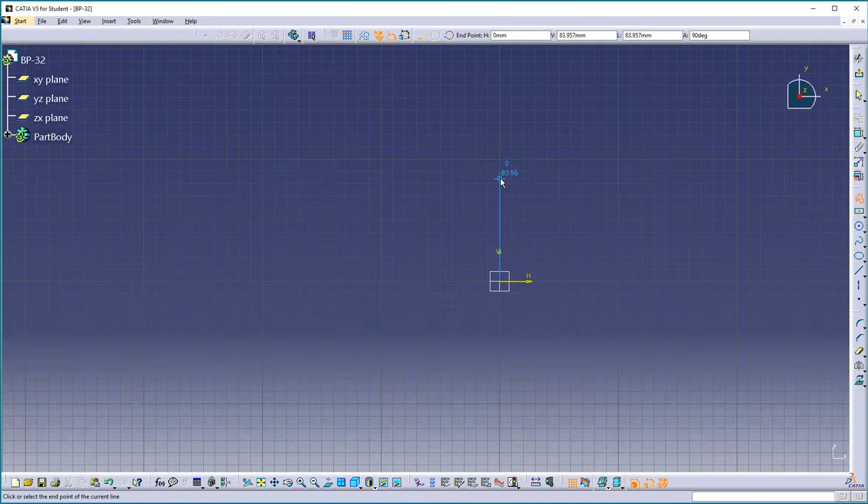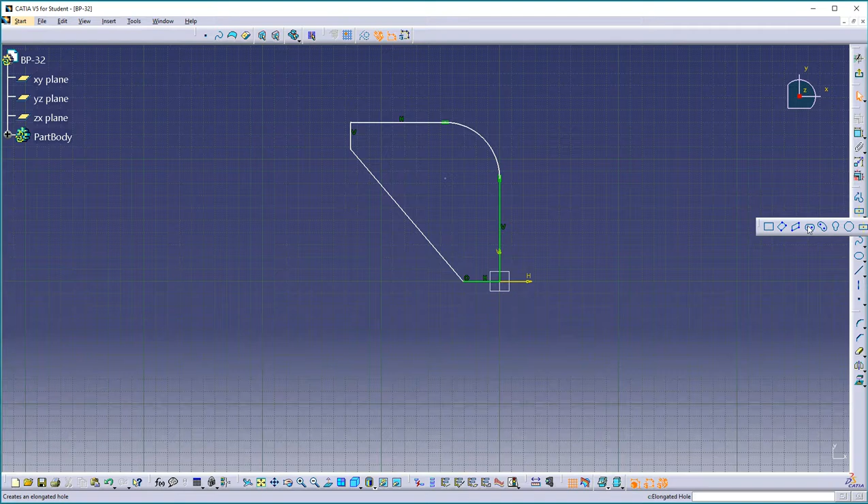I'm going to go to my profiler tool and select here, here, make it come across, here, here, let's make it come down, let's make it come in here, and then close it out. That's our basic profile. Let's right click on this line, object, make it horizontal. Now I can come in with my elongated hole, pick here, and pick up this parallelism with this line here. Now we could add dimensions to this, but this is our basic shape.

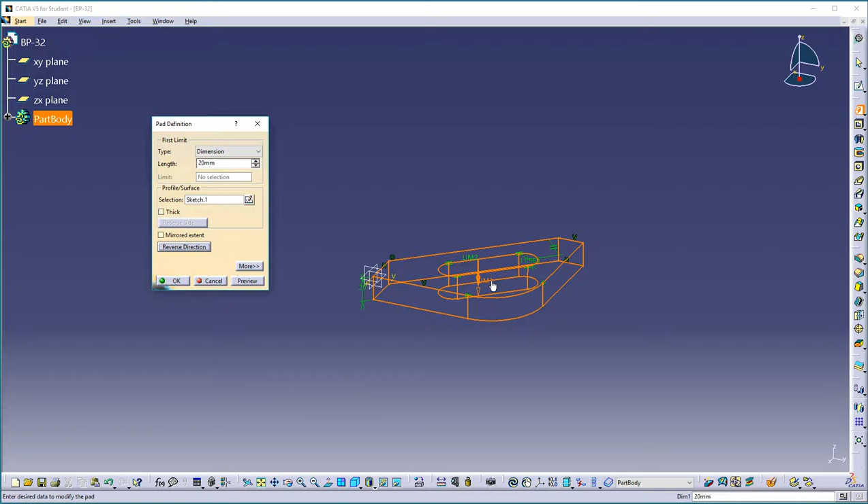Let's get out of Sketcher, and now let's make a pad. I want to keep the axis at the top of this part, so I'm going to reverse direction, and pull it down fairly thick. Now I'd like to make a mirror around that. Now we have half of the part done.

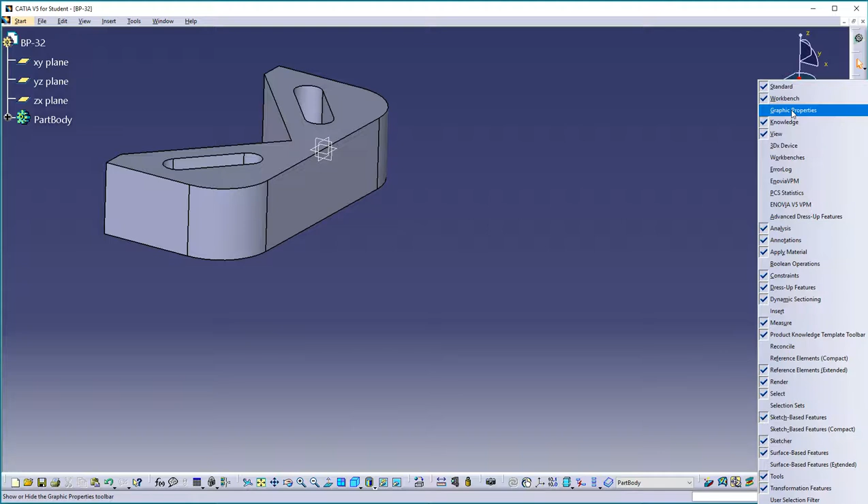Now we're ready to make our sweeping rib that comes out here to the right. One of the things I'd like to do here is go to my graphics properties and turn this blue, darker blue. It makes it easier to see the sketches when we're sketching with that in the background.

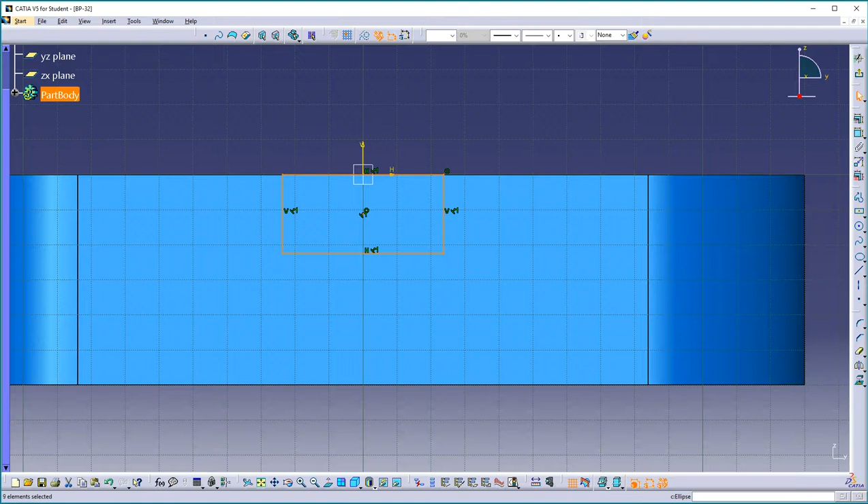Then we'll go to the sketch on this sketch plane, and here we're going to sketch the I-beam profile. I'm going to select this centered rectangle and do something like this. I'll do another one down here, pick up that, and then do one down the middle. Now this is not at all to scale yet, but you'll see why.

I find it easier if I draw them oversized and then I double click my little eraser icon and start erasing things. It makes it easier to pick bigger things than smaller things. Okay, here's my basic I-beam profile.

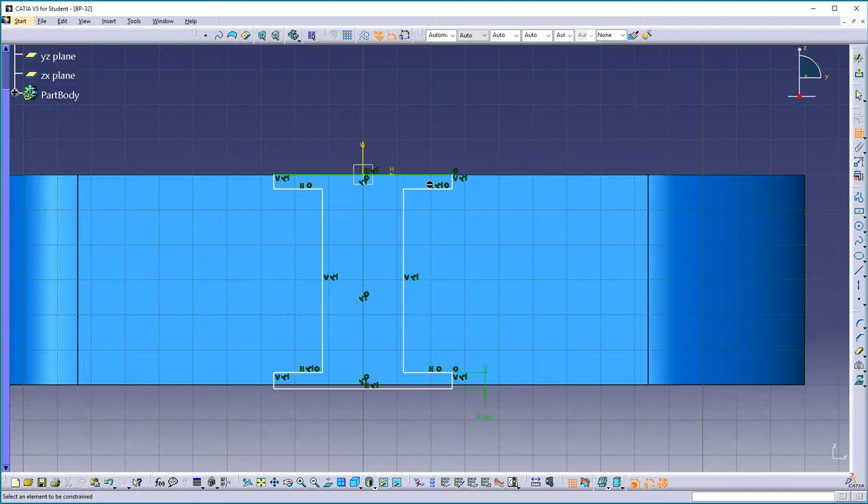Now I'm going to turn off my eraser and make this one a little bit smaller. Now that's the size I want, or close to it, so I'm going to lock it in with a dimension. Then I'm going to move this one up to lock it in, and lock its dimension in. Now if I move this up, it'll position itself just fine. This is my I-beam of what I would like.

Something like that. I'd like to sweep that down some kind of a center line. So let's get out of Sketcher now. You'll have to make the dimensions all perfect for yourself.

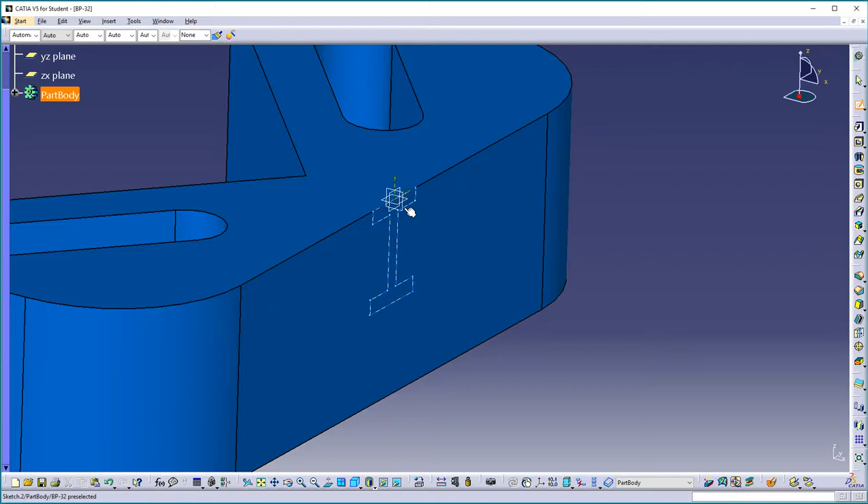Now I'm going to go to Sketcher and sketch on the center line plane. You can see my solid is out to the right, so I'm going to be sketching my center line out this way. I'm going to select my profiler, out straight, make a bit of an arc, then it comes into a straight segment. I'll pick up my tangency, do a little bit of a curve here, and make sure I pick up my tangency here.

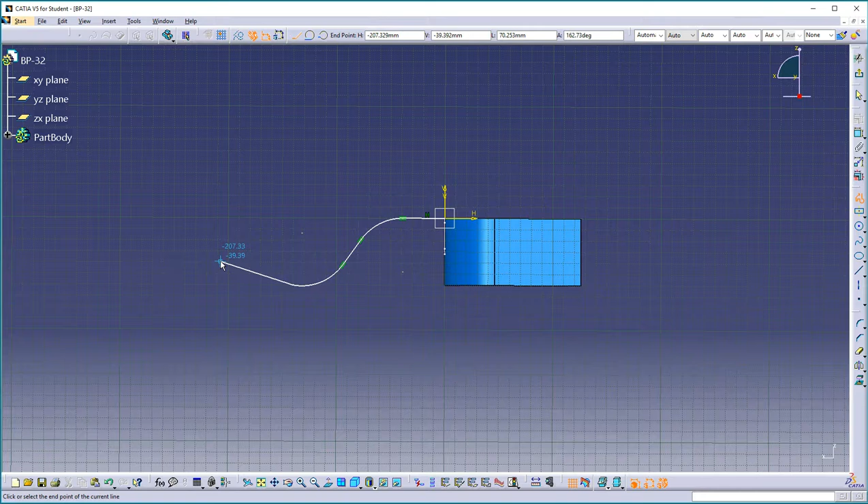Now I'll select this one, right click, object, make it horizontal. Now we'll pull this out to be somewhat in position. Let's make a distance on this one, just to lock it in for now, and then let's move this around a little bit to get it looking more attractive. How's that? That's a pretty good center curve.

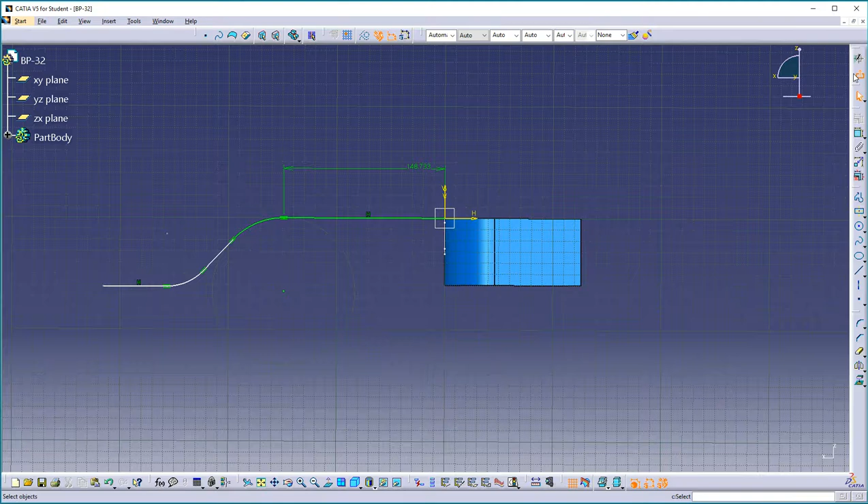Let's get out of Sketcher, and now let's sweep this profile down that center curve with the rib. We'll select this as the profile, that's the center curve, and we'll say OK. Okay, so now we're two-thirds of the way done.

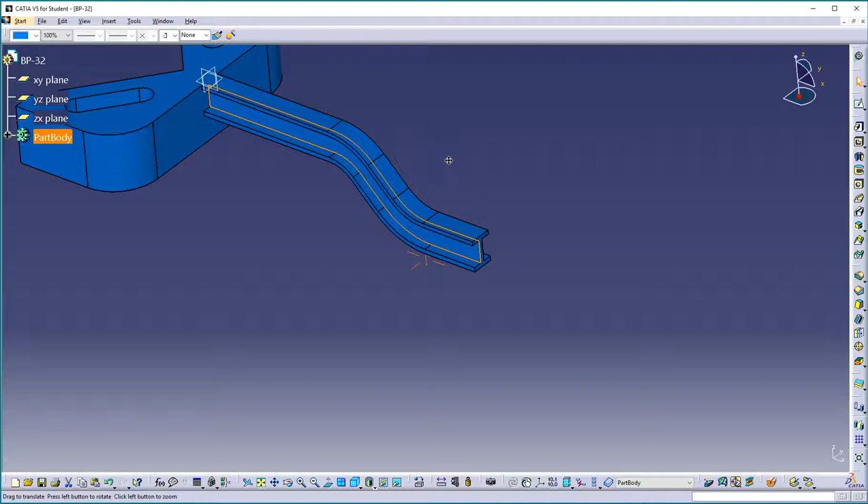Now we just need to sketch our little profile on the end here. So I'm going to go to this sketch plane right here, the center sketch plane. I'm immediately going to put an axis in here. Here's my axis, and I'm going to draw it vertically. Then I'm going to constrain it back to this edge. Right click, coincident. Okay, now there's my axis.

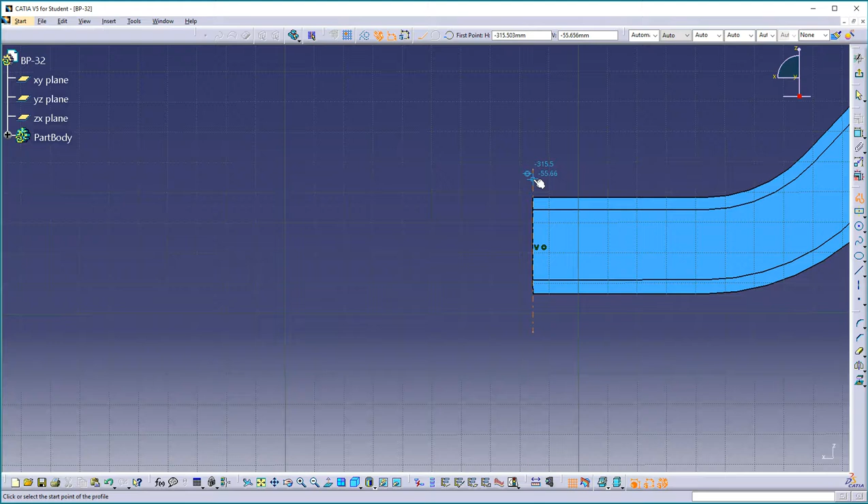Again, I'm going to draw a profile a little bit bigger than I need, simply because it's easier for me to pick bigger pieces. Here we go. Now what I'm going to do is put some dimensions between this curve and this edge, coincident, and between this edge and this curve, coincident. You're getting the hang of it here. I'm not actually putting dimensions on, I'm pulling those dimensions or coincidences from the geometry that's already there. And then finally this one.

Now this will actually need to be a dimension. So somewhere in your geometry, you're going to have to find out what this dimension is. Let's do a dimension, there we go, that one to this one. And then also you're going to have to find out what this dimension is for this line here. Those two dimensions.

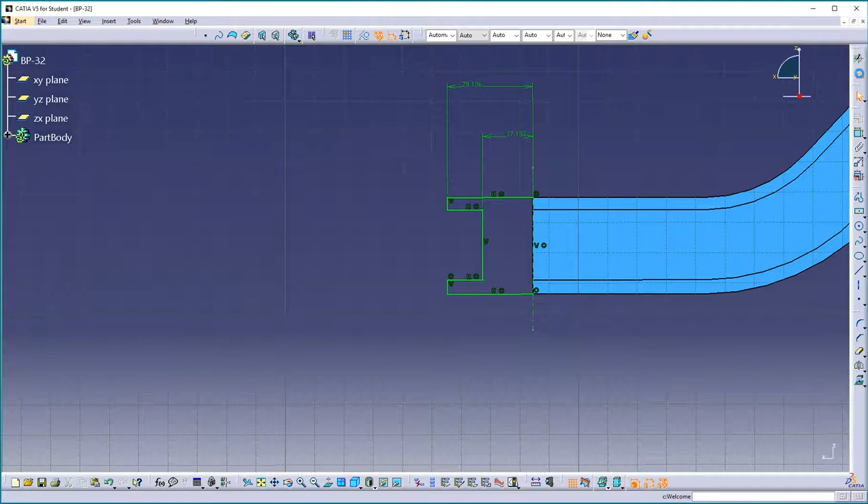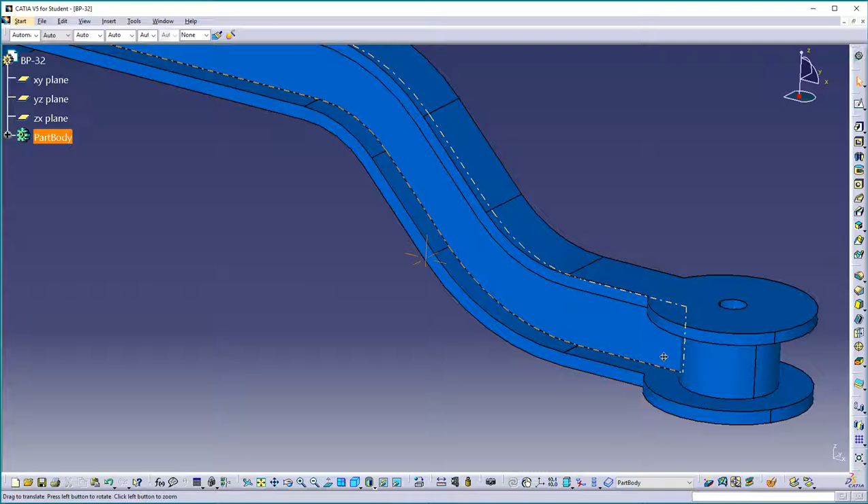Now if you get out of Sketcher, that has an axis system in that sketch, we can simply do a shaft and say OK. Then we can pre-select this edge and put a hole on this surface. It will go right to the center, and we'll simply say up to last and say OK. And that's the design philosophy for making this part.